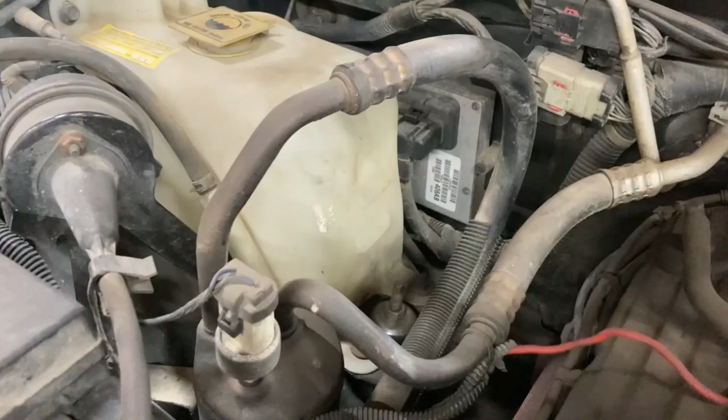This weekend's project is we're going to be doing some work to the cooling system here. We'll open up the hood, show you what we're talking about. First off, we see that we don't have any coolant in our overflow jug. Not a good sign, not a good thing. But we get to the root of the problem.

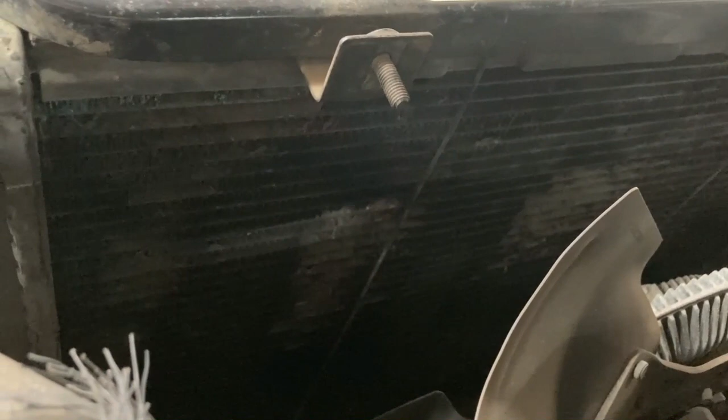We have a leak in our water pump here. We could tell because when we got underneath, we could see that it was dripping from the bottom of the water pump, and you can see that leak. In addition to that water pump, you can see that the radiator is in bad shape here. It's kind of rotted out and it's not looking good. So we're gonna change the radiator and the water pump.

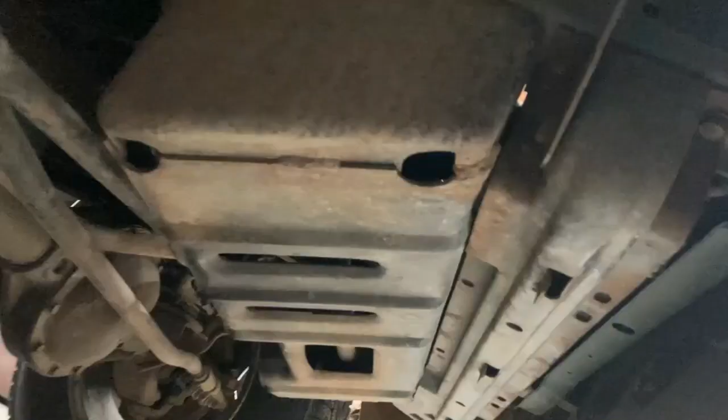But the first thing we got to do is remove the skid plate, and then we got to find the petcock on the bottom of the radiator so that we can drain the radiator. That skid plate there was just 4 bolts, 2 on each side here. They're 17 mil, at least in my case. So drop that down, take those bolts out.

You see over here on this side, the idea is that instead of this falling on your face, you just loosen those 2 up and they kind of still support it. And then you would remove these 2, and then you would just push it that way, drop it down, and get it out of there.

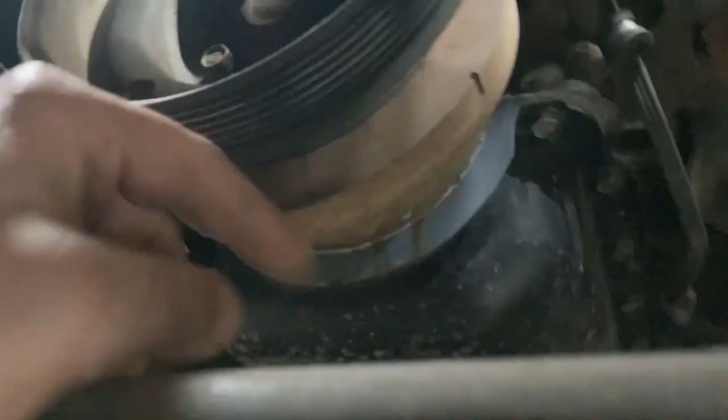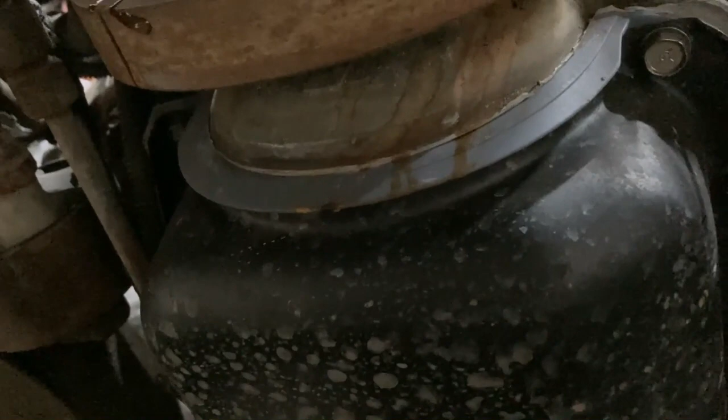If you look there, you can see the discoloring, and that was where we had evidence of the leak. That might be a better look there. And then you could see it dripping off of the bottom of the harmonic balancer.

So to get that serpentine belt off there, this is 15 millimeter, just used a socket and ratchet with extension if you needed to, which is just basically a pipe over the handle. You're gonna turn it clockwise and then move this to get the tension off the belt, remove your belt. If you don't have a sticker on here that shows you the orientation of the belt, might be a good idea just to draw a rough sketch before you take that off, so you know which way it goes back on when you have to reinstall it.

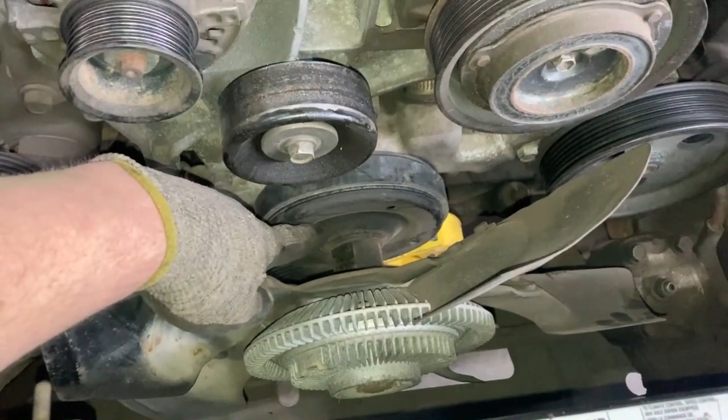So now with our fan here, that threads on to the sheave for the water pump. And what I got going on here is I just got that strap wrench around the sheave, and then as I turn this up, it hits against this one here, and then hopefully the tension on this rubber strap will hold the sheave tight enough that I can get the nut loose here.

I just got a modified wrench. I don't know what size this is. It's roughly about 1 3/8 inches. It's likely some kind of metric size that I don't have, but anyway, I modified this wrench and then I fit that on there. Give that a crack, snap this loose, and then you can thread off the fan there.

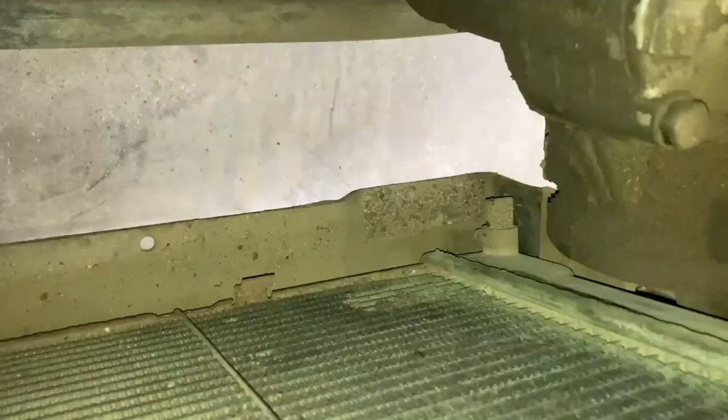Down in the corners where the petcock is, that's what will open up to drain the fluid out. You can connect a hose on there, run that hose to some kind of catch basin to collect all the antifreeze, and we will drain the system. Over on this side here, we have our lower rad hose, and then there, right here is one, and there's the 2. Those are the 2 connections for our tranny cooler.

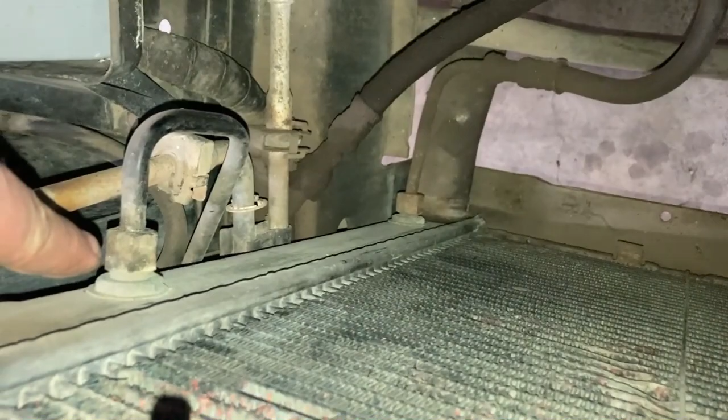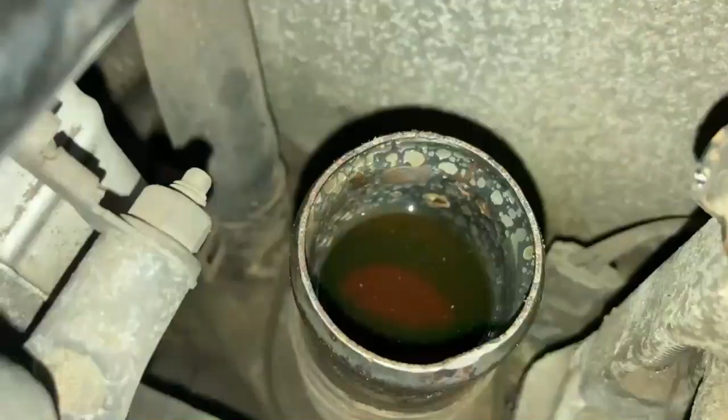Have an interesting circumstance here. We were trying to drain this radiator and it's not really draining. We got some fluid in the bucket there. We opened up our top hose to help have that drain down, and then we ended up removing it altogether, disconnected it from here, and then we disconnected it over there. So we have our fluid in there. We can expect that because I guess the thermostat would be closed, so that seems normal.

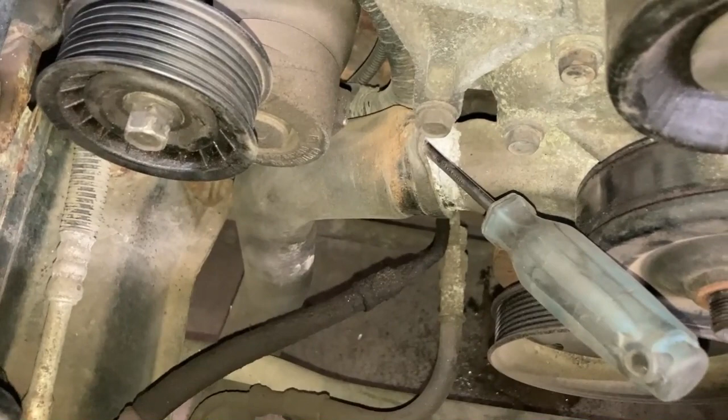I put a screwdriver in here to open that up at the top, and you could hear some gurgling action going on, so we entered some air into the system to help drain it, but we aren't getting any more drain action over there in the tub. So I think what's going to happen here is when we remove this lower rad hose, we're gonna have a bit of a mess coming both from the engine and from the radiator. I suspect the condition of the radiator has caused a blockage where we don't have flow or minimal flow. This is where we're at. We still have to drain the system before we can proceed.

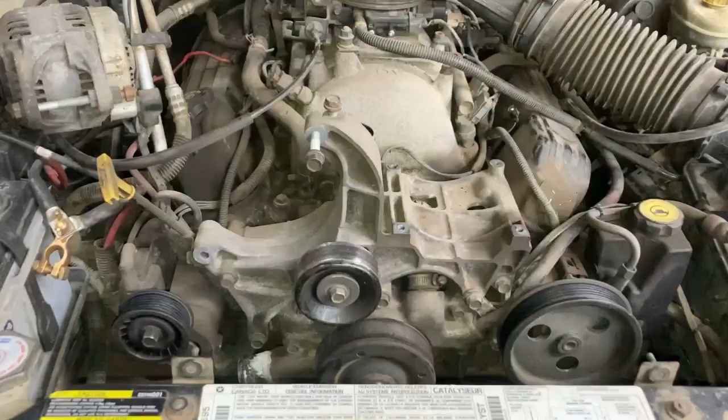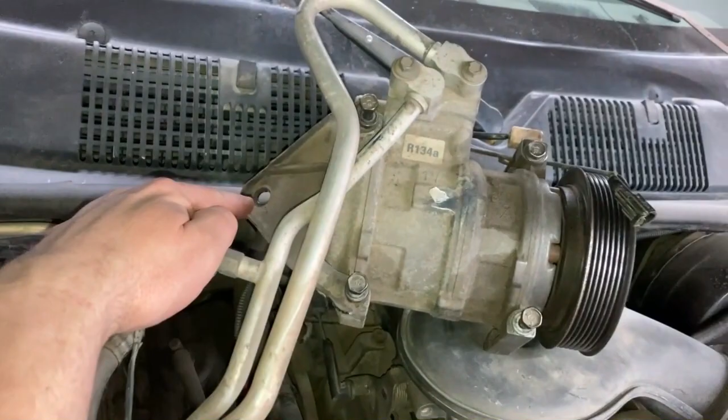Continuing on with the disassembly here, first what we did was we took off the AC compressor right there, and that's going to be 13 mil. So there's 4 on the compressor, and then there's 1 right there for the bracket. That bolt ends up being right there. So that takes care of the compressor.

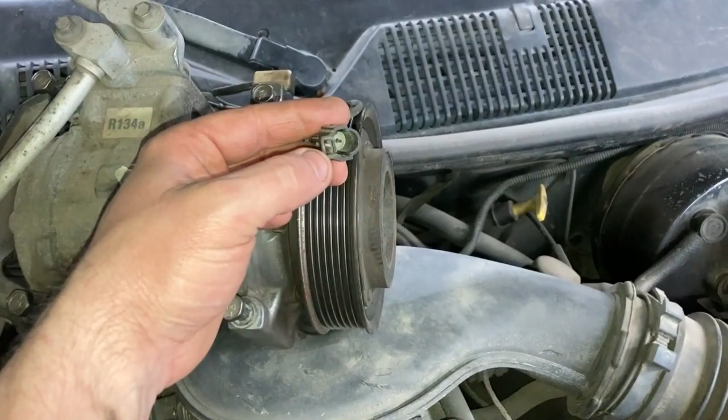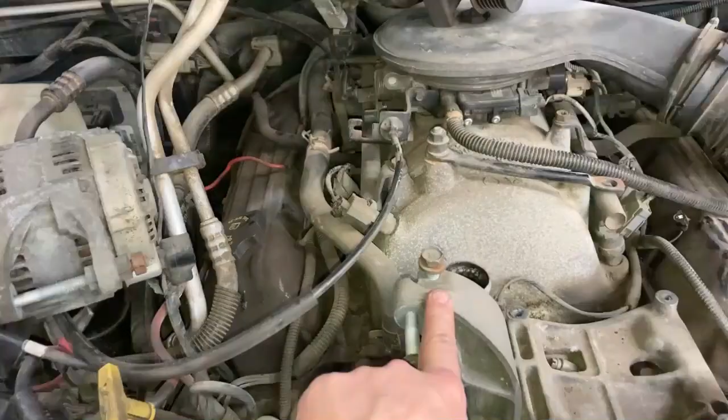And we had to disconnect this, and we also had to disconnect our throttle cable from here. So we disconnected the throttle cable because that went in through our piping. So we had to remove that so we could lift that up from there, and we're just setting it on top out of the way. Next was our alternator. I do believe this is a 15 mil on the top, and then we had a 13 for this here. We take this nut off.

So we had a 13 for the top nut, and then we take that off, and then you get down, that's another 15 mil, I do believe, to just loosen this stud. All we want to do is loosen that off of there, and that was connected to up here. And then we have two 15 mil bolts, one here, one here.

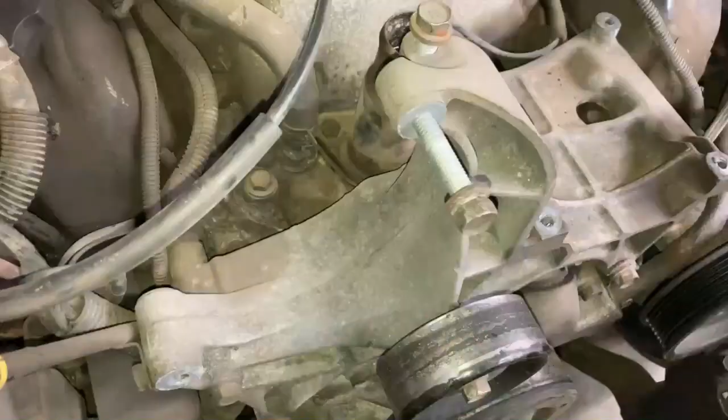There's the bottom one that goes there. This top bolt here will go there. And we've left the alternator hooked up. We just lift it up, put it out of the way as well.

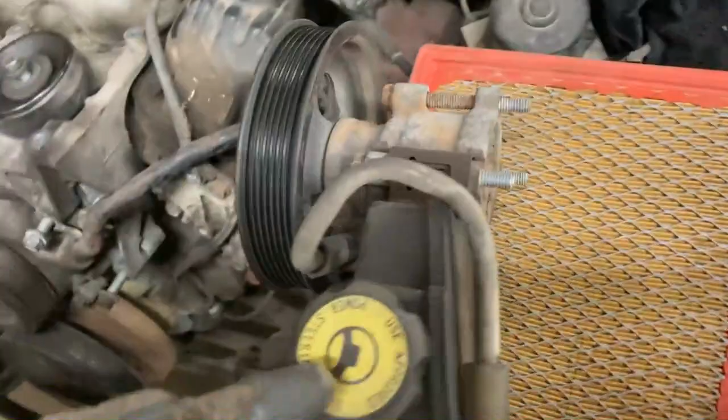Next we have the power steering pump here, and that's just going to be these 3 bolts here, which is a 13 millimeter. You'll turn your pulley to get your socket and extension in there to grab the heads of those bolts. Those 3 are bolted right there, 1, 2, and 3. Take that off. I just set it off to the side here.

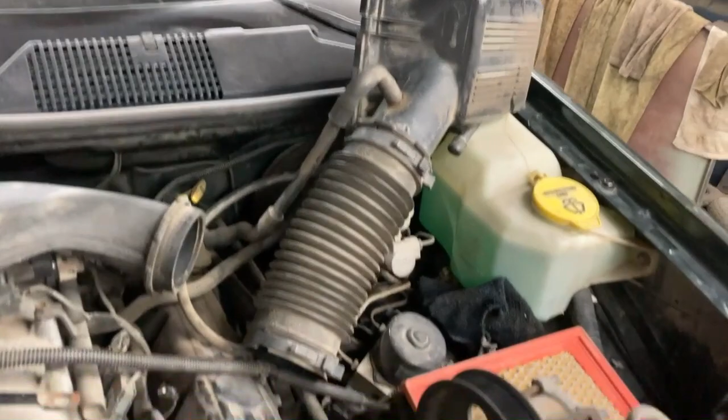In order to do that, I had to remove the top part of the air cleaner there. You're gonna have to remove this idler, which goes right there, because in behind that is one of the bolts there. So these are all 15 millimeter, including the idler there.

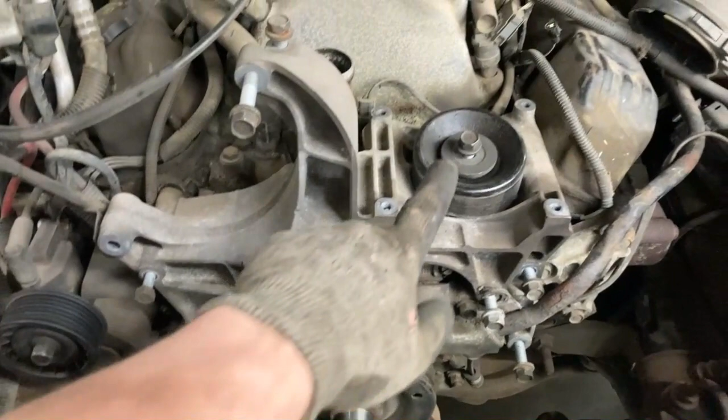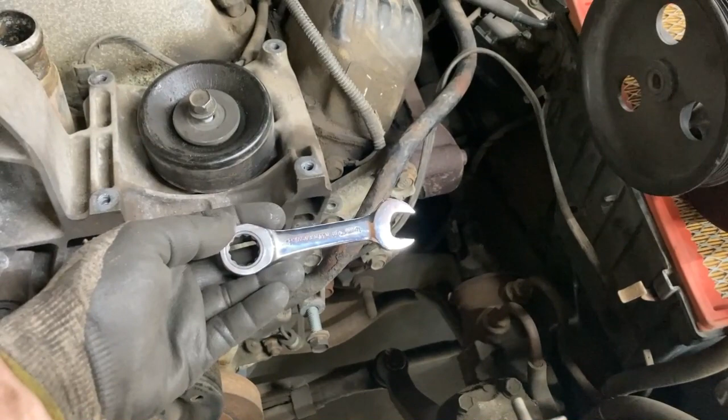The bolts to remove this bracket here, 1, 2, 3, 4, 5, 6, and for that one there, because this pipe is kind of in your way, you're not going to be able to get at that. I just use a short little ratchet wrench, get it in there, break it loose. Once it's loose, then you can hopefully get it out by hand.

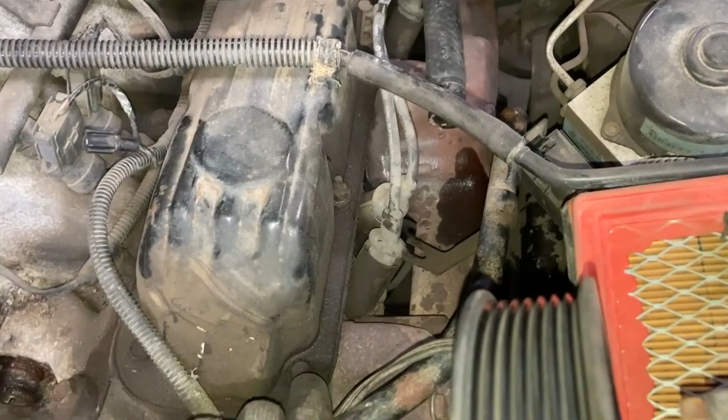Water pump removal here, what we got is there's going to be a pinch clamp. So we just remove that pinch clamp there off of the hose, disconnect it there. We have this fastener on the side of the tappet cover that holds the bracket there. That's a 7/16. Coming down, this is just going to break free with an O-ring here.

We got our 2 gear clamps, likely a 5/16 socket or flathead screwdriver to break those free. All these bolts here, so we got 3 along the top, this one, 5, and then 2 on the bottom, 6, 7 bolts, so should all be 9/16. Remove all of those, and then this thing should pull right off of there.

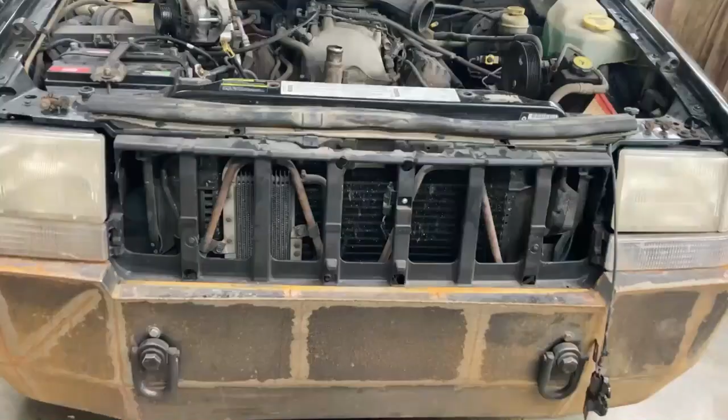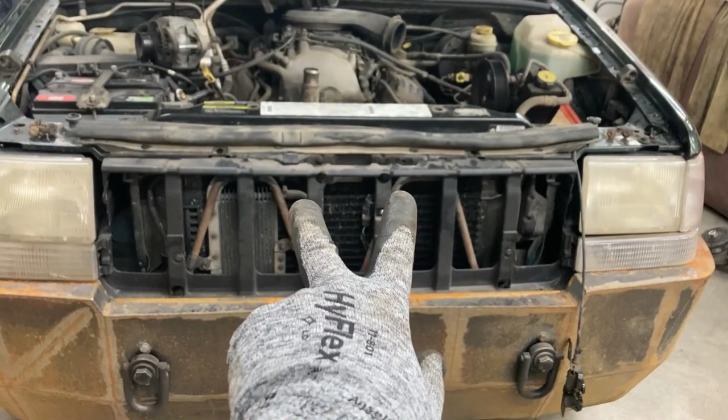To remove the top rad support here, we got a bunch of stuff we got to take off. So this is the latch for the hood, and that just goes along there, and then there's going to be 2 nuts that hold that on. Those I do believe are going to be 13 millimeter. As well on the top here, you got 1, 2, those are from the radiator itself. Those are going to be again, I think those are 13 millimeter.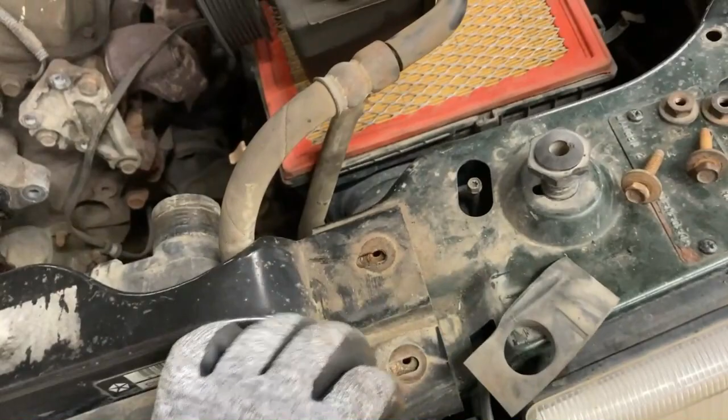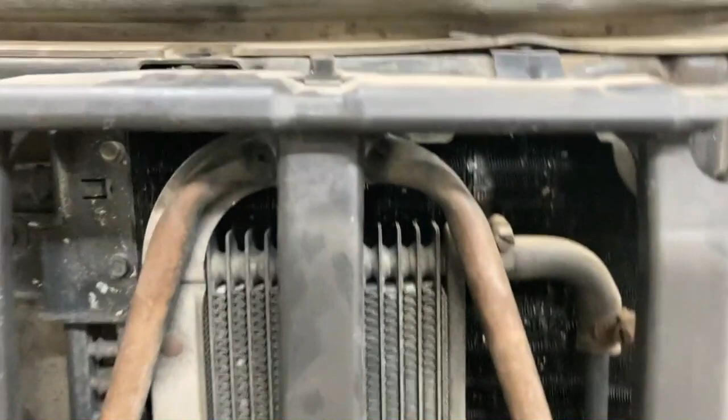And then on the ends here, we've got 2 there. Those are going to be 10 mil. So the grill support here, there's 1 there, and there's another one there. Those are going to be 10 mil. Again, on this side, you're going to have 2 here. Those are going to be 10 mil. When we get under here, there is a bolt there and another one there. Those are going to be 10 mil as well.

For the grill itself, there should be 2 screws on top, another 2, 1 there and 1 there. You remove those 4 screws to pull the grill out, then you got access to remove all these other things.

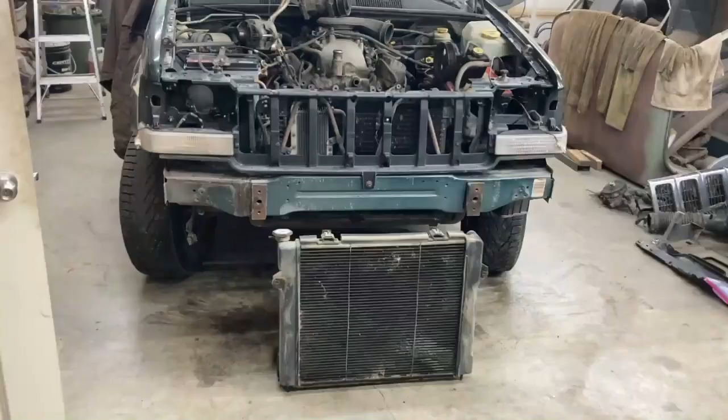In removing the radiator there, I thought I had to remove my front bumper. Thought there were some fasteners on the bottom of the radiator that I had to disconnect, so that's why I removed the bumper to get at those. There aren't any fasteners down there, but there's an adhesive strip on both sides here and here where the air conditioning condenser is kind of fastened to it.

That was on there pretty good, had to work to get it out, so it did help removing the bumper to get that apart. There was 2 fasteners here, one there, both 10 mil. You remove those, they were the 2 that connect the condenser to the radiator, and as you can see, there's 1 here and 1 there. After removing those 2 fasteners and breaking that adhesive strip on both sides, then you can separate the radiator from the condenser, and it should pull straight up.

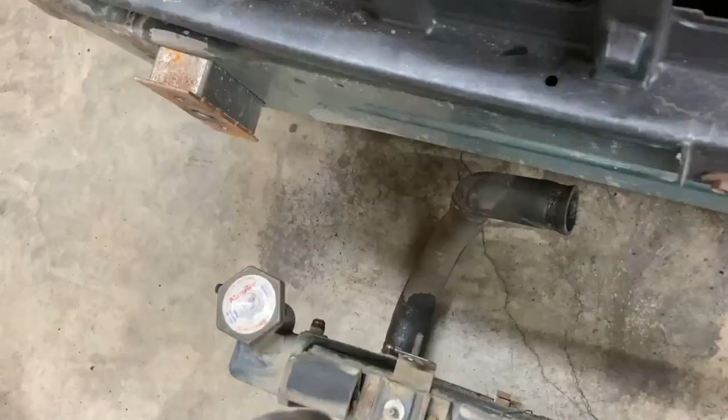And then the last thing is there's a hose right here that connects to the top of the radiator. That hose is right here. This is the hose that goes to our overflow jug over there.

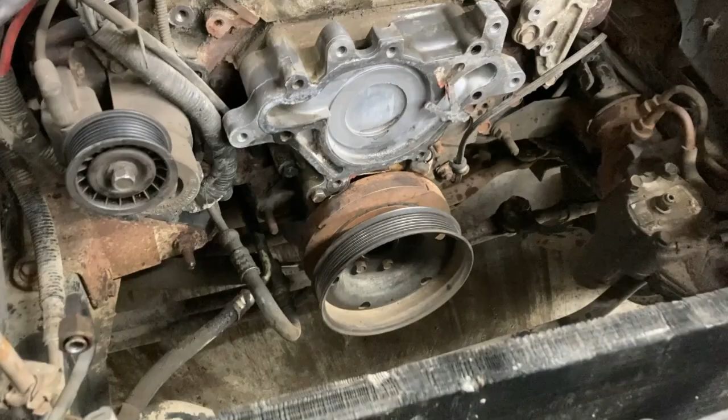As you can see down in there, that's going to give us some more room to get our puller on there to pull that harmonic balancer off. Once that's off, there's a few more bolts left to take out, and then we should be able to get this timing chain cover off.

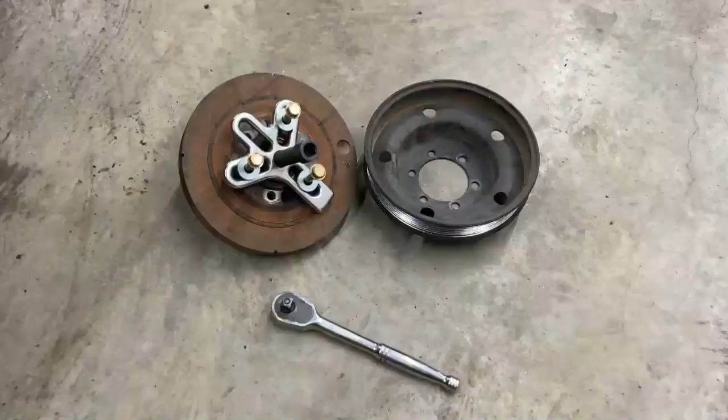So we got the harmonic balancer off there. First thing, you want to remove the sheave. Those are 1/2-inch bolts, so you remove those 1/2-inch bolts. I'm using this style puller here. Those 3 bolts will thread into the holes for the sheave, and then it's got the center piece, and then it just uses a ratchet to go on the end there, and then that just slowly comes out.

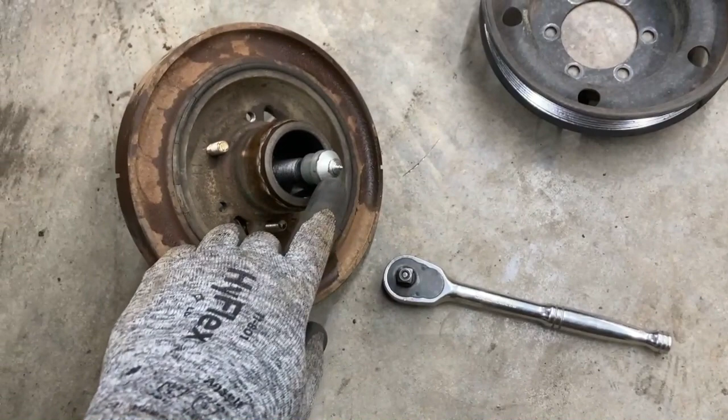On this end, it's got that shaft saver end on there, so it's not going to damage anything as it pushes off of the crankshaft to pull this off. And then you see in here, it looks like there's a sleeve on there.

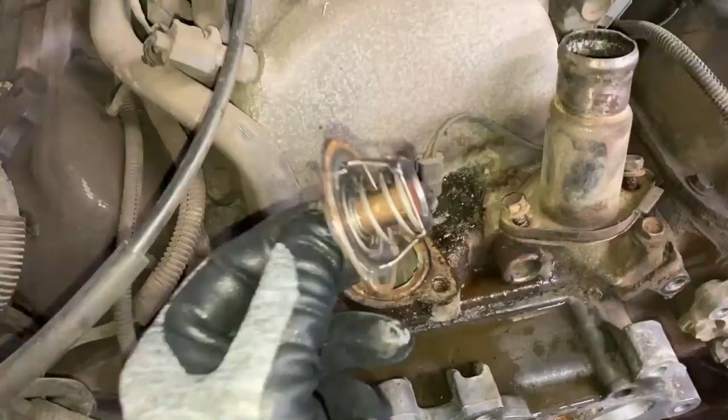And then here's our thermostat here. It doesn't look too bad, but what we could do is throw that into a metal cup and heat up the water and see if we can see that operating correctly at boiling temperature. I wanted to do this first because this neck was full of fluid. I wanted to take that off first and drain all that fluid off there before we take this timing chain cover off.

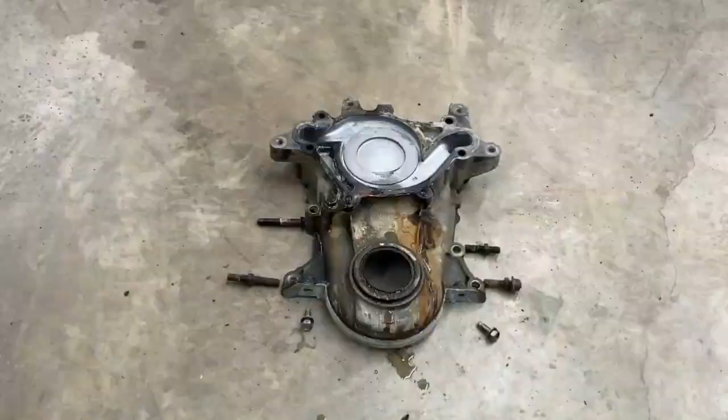I've made mention in other videos before where it was actually on a small block Dodge where I got these 2 bolts mixed up, and the length of them wasn't very much different. I don't know if it was a 1/4 inch, 1/8 of an inch. It wasn't very much, but when I mixed those 2 bolts up, it ended up hitting the number 1 cylinder bore and popping a perfect little hole through the bore. The next thing you know, I had antifreeze and the oil all mixed together.

Ever since then, I take extra care to make sure that I put the bolts back where they came from. Now, in this case, if we take a look here, these are the same length, so I wouldn't have that problem in this case. And even if we got this one on this side mixed up, they all have the same depth. But it's a haunting thing for me because that was a hell of a way to wreck an engine over 1 little bolt.

After that little interlude, these are the bolts that are left. You got the 2 for your oil pan on the bottom, and then you got these 4. The bottom ones should be 1/2-inch socket. Those other ones should be a deep 9/16 to remove those, and then that finishes it off so we can get the timing chain cover off.

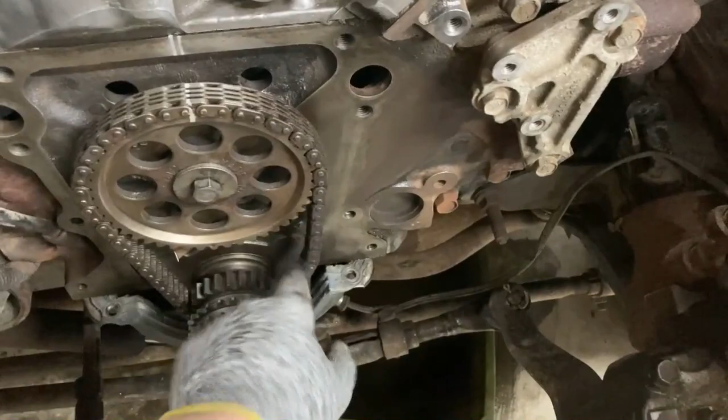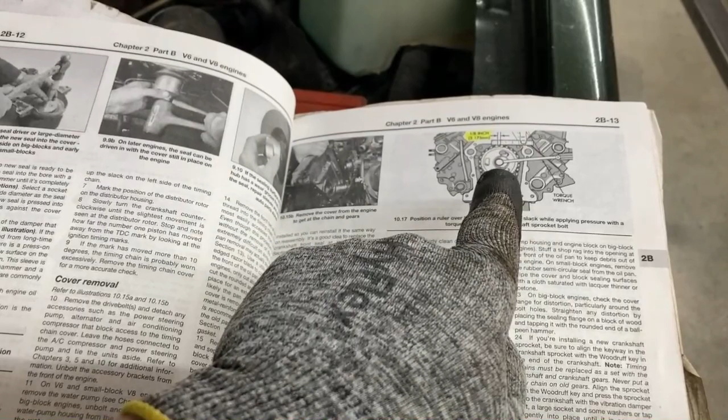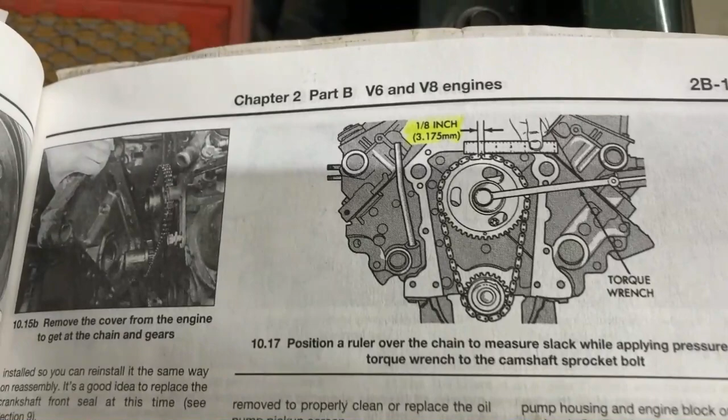Before we remove this timing chain set, we're gonna check it out. We already know that it needs to be replaced because of how loose the chain is. That's obvious, we can see that. So I just got a manual here, and as it's highlighted here, it basically says you want to get it to top dead center, and then you want to use a torque wrench and apply 30 foot-pounds and see what the deflection in the chain is. Anything over 1/8 of an inch means that it's going to need to be replaced, and if you're replacing it, they're suggesting you use a whole set, which is both the sprockets and the chain.

Now, this is the torque wrench we got on here. We're turning that until the needle hits 30 on there, and then we stop, and that gives us our deflection. So I marked it at top dead center, then I've moved it, made another mark, and measured in between the 2 marks there. As we look at the ruler here, it looks to me like it's roughly about 3/16. So it's over our 1/8 of an inch.

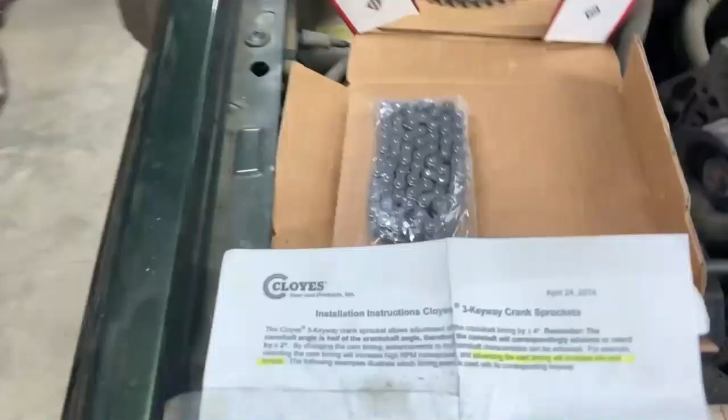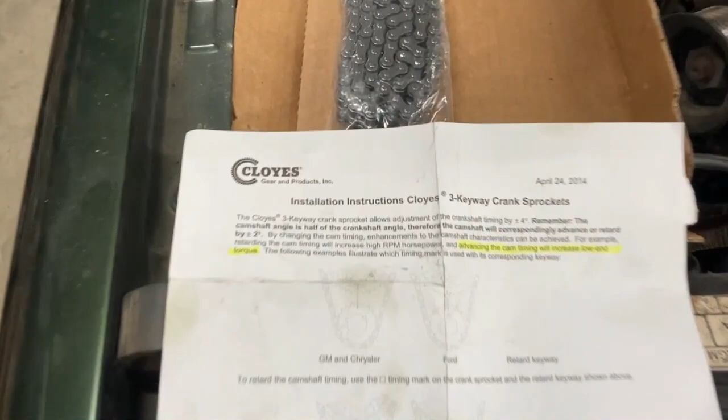If you want, you just get another factory replacement chain, you replace the timing set, and you're done. In my case, I've got an adjustable timing set here, and it has 3 adjustments on here. So you can either go retarded, factory, or advanced. And me, I'm looking for this part here where it says advancing the timing will increase the low end torque. That's what I'm interested in.

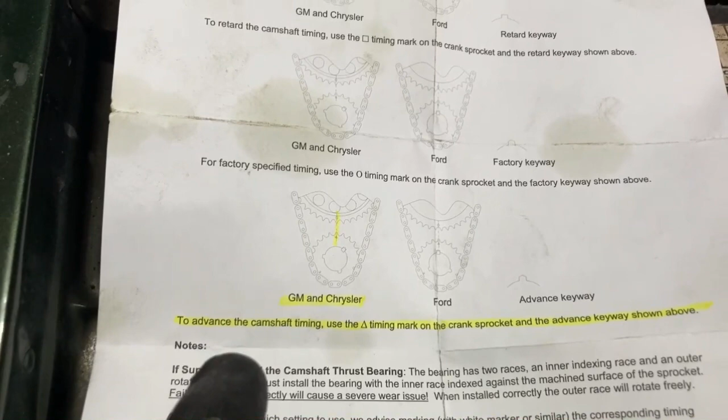And then when we look at this part here, it says to advance the camshaft timing, use the triangle timing mark on the crank sprocket and the advanced keyway shown above. You're going to line up your triangle with this mark here, and then you're going to use that keyway. This keyway corresponds with the triangle. It might be hard to focus, but basically there's a pointy end there which represents the triangle.

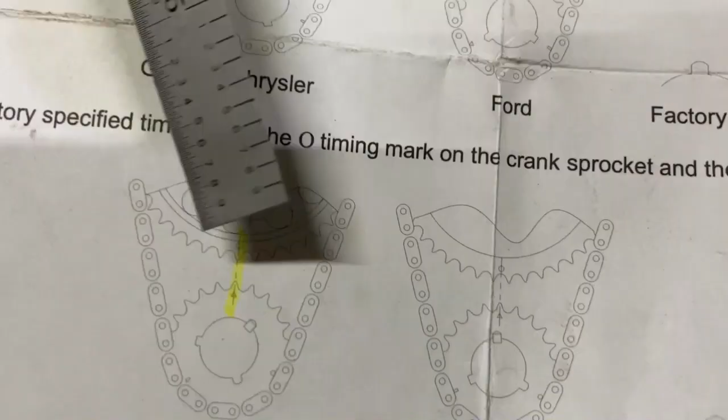This is what we're doing to set it up for advance. Now, we could just stop there and continue forward, but I'm just going to throw a little extra theory at you. First of all, some people might ask, can you advance the timing on a Magnum engine because it's computer controlled? Good question. Here's my answer.

So right now, as we take a look here, the chain is stretched. When it's stretched, it's moved it counterclockwise. Counterclockwise on the cam sprocket is equal to clockwise on the crank sprocket. And that is the same as advancing the timing with this timing set here.

If I was to put numbers to it, I think for every 16th on our measurement, I'm just going to throw a number in there, but I think that's going to equate to maybe 2 degrees. So 2 degrees times 3, because we had measured 3/16, and I'm going to say 1/16 equals 2 degrees. So then that means we're 6 degrees out.

Basically what I'm saying right now is the engine is advanced right now with a loose timing chain, and by me advancing it with the timing chain set, I'm not changing anything. It's the exact running condition of the engine right now. So here is our crank gear. Now, I just want to kind of illustrate what I'm talking about just with this gear.

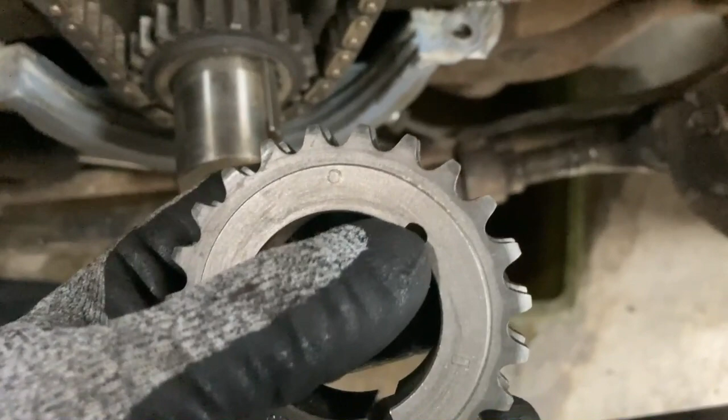That's the circle, and the circle is supposed to be the factory timing, and that's represented with this keyway, which is rounded. Now, when we put that there, these timing gears should line up, because this is right up beside the factory set. If we take a look in here, it does look like this one lines up with this one. So that makes sense.

Now, if I want to advance it like I suggested, I'm going to use the triangle. That is represented with the pointy end of the keyway there. So triangle and this. This triangle is supposed to line up to that dot. So now, if we take a look, you can see how the tooth is just shifted over just a little bit. Clockwise rotation, advanced.

Now, if we go to this one here with the square, the square end keyway, that represents retarded. Now, we take a look and we see that this tooth is now on the other side of the factory one. So that represents with this sprocket the difference in the timing and how much it changes sprocket to sprocket.

If we go back to what I was saying, I want to go to the triangle. If we go back to the triangle, you can see where my tooth is going to be shifted over. Now I'm just throwing this out there, but if you take a look at maybe the width of that tooth, right? If it touched the edge of that tooth and you just moved it over that much, that's not much far off from what we got up here.

It is less, right? So like I said before with my numbers, I think that what I'll be doing is advancing this by a total of 4 degrees as per the adjustable timing set says. But I think right now I'm advanced at 6 degrees. Going to install the timing set now.

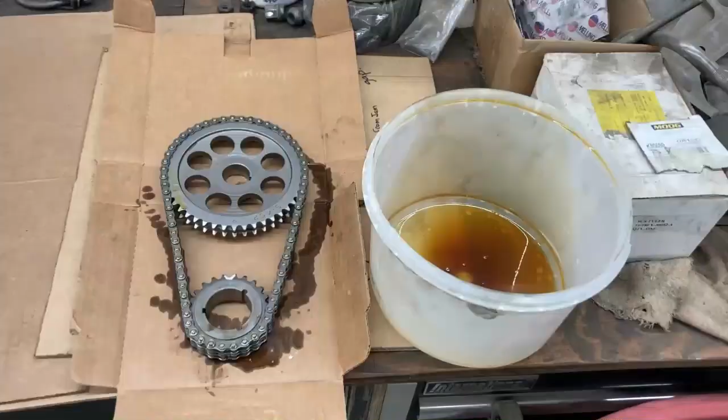We just soak that chain in some oil, lubricate it before we install it so it doesn't run dry on startup. And as we said before, we've got our triangle, and that is going to line up with our timing mark. So we're going to set it on this cardboard here, get it situated, ready to go, and then we're going to install that on the engine.

I've installed the adjustable timing set. We advanced that by 4 degrees as per the instructions in the set, and we put the timing chain cover on and the harmonic balancer, just temporary here. I got a couple bolts in the bottom holding that together, and we just got this started on the keyway. Not all the way, because then I'd have to pull it back off again with the puller, but just started so that everything lines up and we can check our marks here.

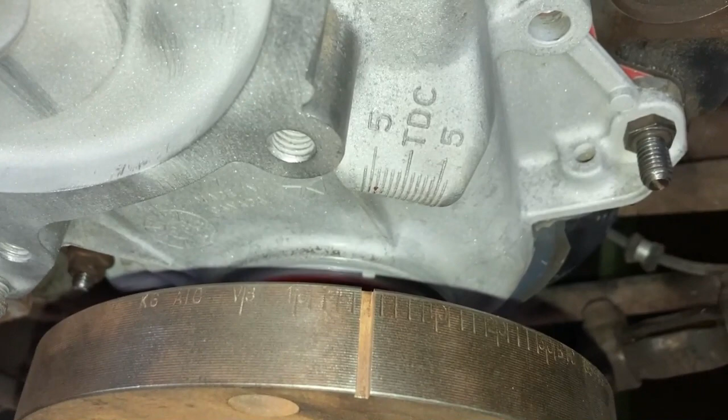So those are the marks that we have on the timing cover, and these are the marks on the harmonic balancer. There's top dead center, and then if you look, it's 1, 2, 3, 4, 5, and then 1, 2, 3, 4, 5. I just got this piece here. We're going to stick it in the slot and line that up. As you can see, on this side we see 3 marks, and on that side it looks like it's just touching the 5. So we're on 4 degrees, which checks out with our timing set.

And if this is top dead center, and it's before top dead center, and advanced is opening up the valves before top dead center, that all checks out.